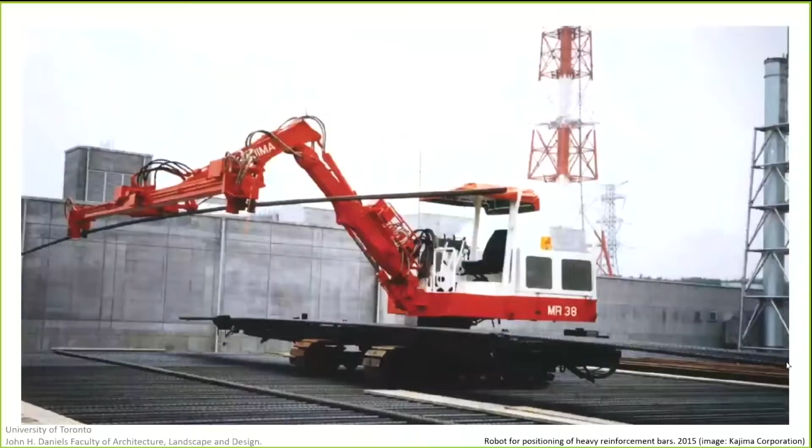But before we go there, I wanted to briefly touch upon, if not a history, but maybe a context of what construction automation and the relationship between a machine and a designer look like today, and what that relationship used to look like. And of course, today we see a lot of construction automation progress, as I'm sure is being talked about at this conference. And a lot of the construction automation is happening within these two larger discourses.

One is mobile and other types of machines for surveying. And the other one is automation of existing construction processes. So taking equipment that is already there, like this robot for position of heavy reinforcement bars, and then automating it such that it doesn't actually need a real-time human operator, or maybe only requires a teleoperator.

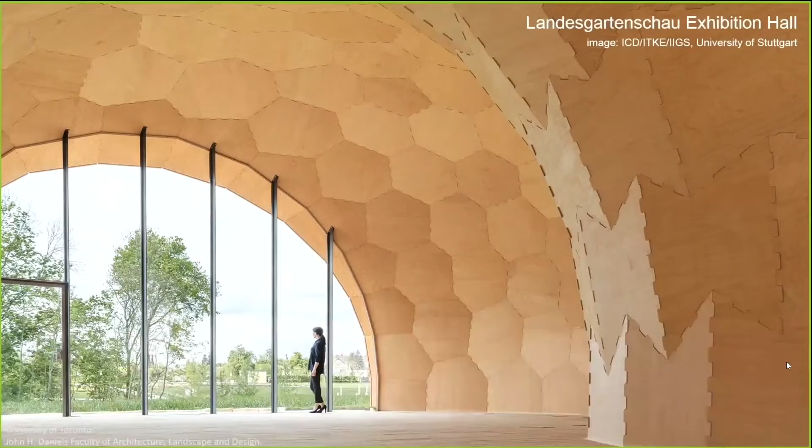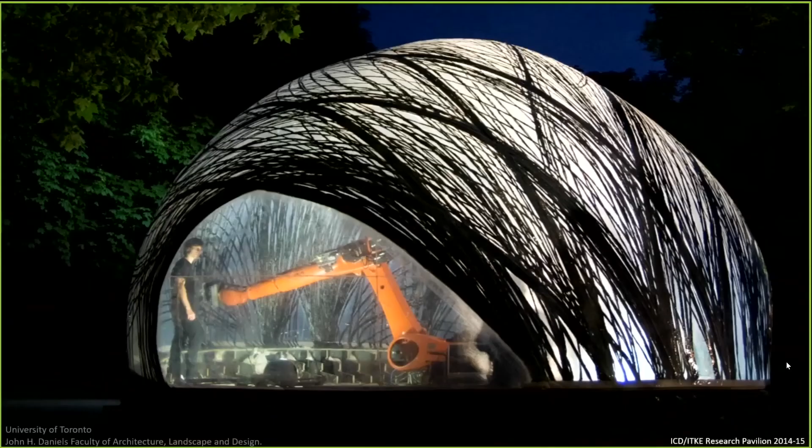And then, of course, there's another context that you're all familiar with, which is a more research-driven, more exploratory context, where we're not necessarily looking into traditional construction methods, but we're looking into technology itself and trying to figure out what new construction methods it actually allows, and what design spaces these types of technologies open up. And historically, this type of development and research has really been spearheaded by researchers in architecture and design using robotic arms.

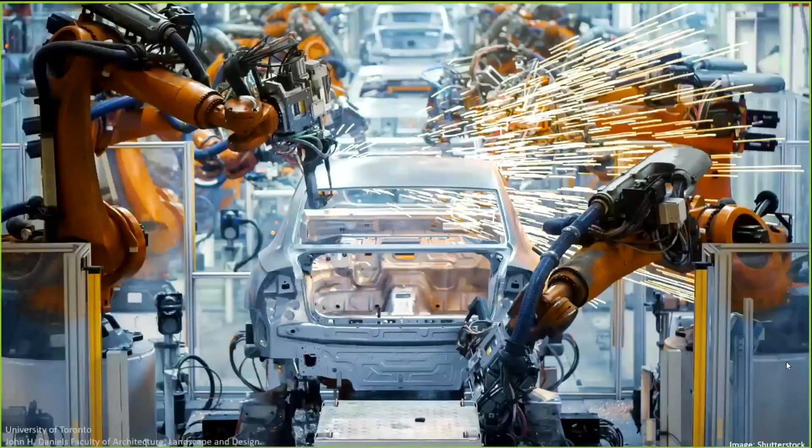That largely comes from a moment in time where they suddenly become available, and largely, of course, comes from the fact that they're extremely universal and reprogrammable and are capable of many different operations and many different tasks. However, despite the fact that we like to think about them as universal and reprogrammable, they actually come from a very specific place and a very specific set of tasks. They're generally designed for a manufacturing line where objects that are being produced are moving from one workstation to the other, and then machines continuously perform operations on them.

And in appropriating or reappropriating this type of equipment from the manufacturing side and bringing it into architecture, we as designers have to deal with a lot of constraints and limitations that these machines bring. One of the obvious constraints is, of course, reach, payload, the weight of the robot itself. If you were to imagine installing a machine like this on site, that comes with a lot of limitations. The structure needs to be able to support the momentum forces, et cetera.

But also, of course, economical and cultural constraints, such as the very steep learning curve, which is partially designed to be that way and partially just happens to be that way.

And of course, the cost of purchasing and running a machine like this. So somewhat in opposition to that status quo, and somewhat in addition maybe to that status quo, my practice lies around not necessarily interpreting and appropriating machines from the industry, but really trying to reinvent machines from scratch, almost sort of like reinventing the wheel, which may or may not be a productive undertaking, but I happen to enjoy this undertaking, so that's what I do.

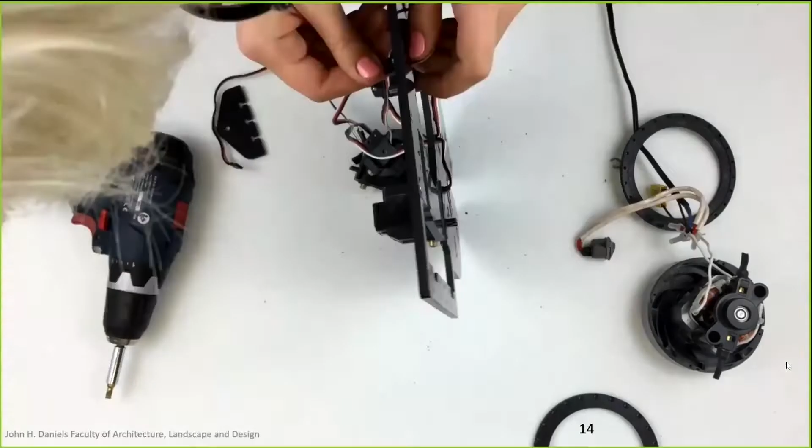But also the web directly relies on the shape of the environment. So depending on the space in which the spider decides to build its nest, the geometry of the web will change. So sort of thinking about this interdependency between the three parameters, the site, the object, and the machine, I've started developing, potentially naively, but also in retrospect in a very productive naivete sort of way, a first set of machines for fabricating in existing architectural environments.

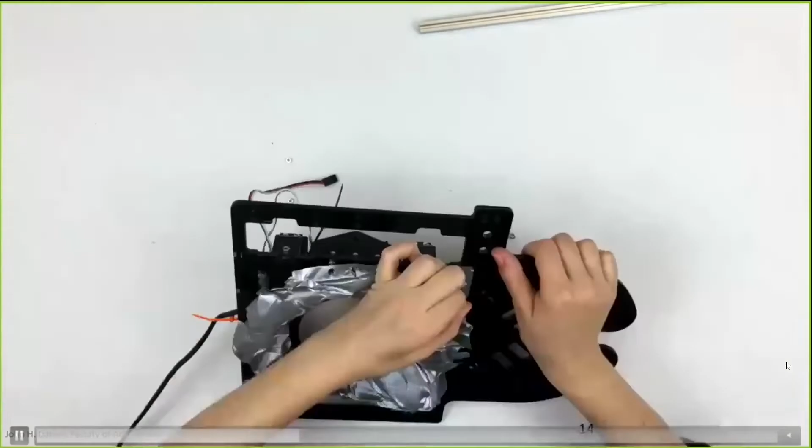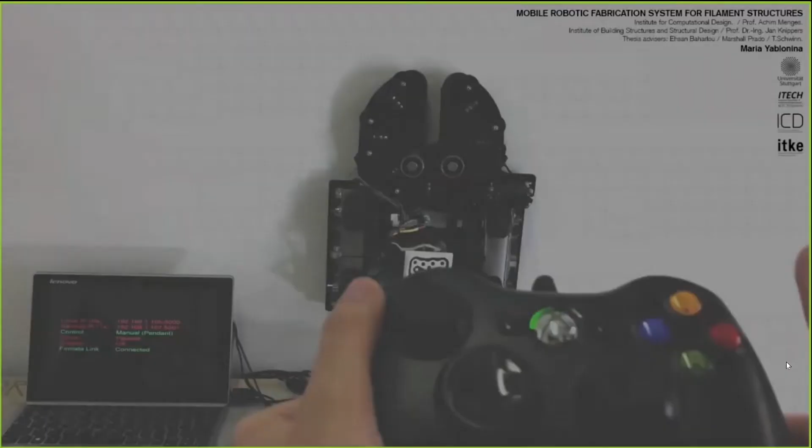And the reason why existing architectural environments became really interesting to me is I really wanted to explore not necessarily this notion of building from scratch, which is pretty stereotypical to the field of architecture, but really the notion of revisiting, potentially repairing, and reprogramming spaces that are already there instead of building anew. So this particular machine is able to navigate its environment.

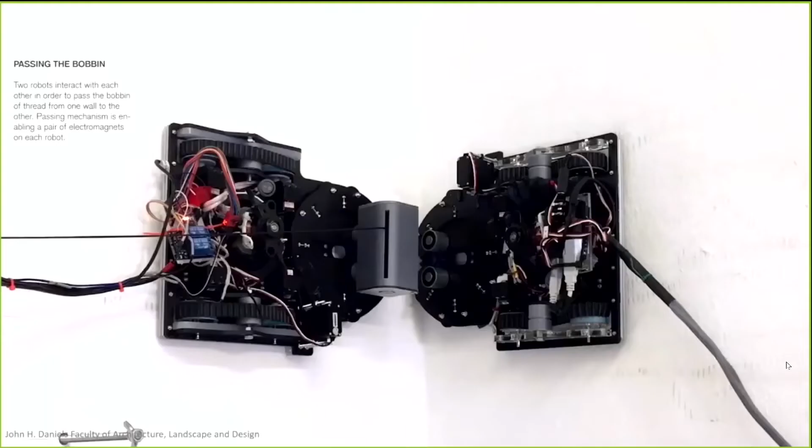The way it navigates its environment is it climbs along vertical or horizontal surfaces, but I guess the vertical surfaces is what matters. So it can climb walls. It can navigate. It knows where it is in space using an external camera system. It can carry a piece of material, and it can interact with another robot of the same type by meeting it at the corner between two walls and passing this material cartridge between them.

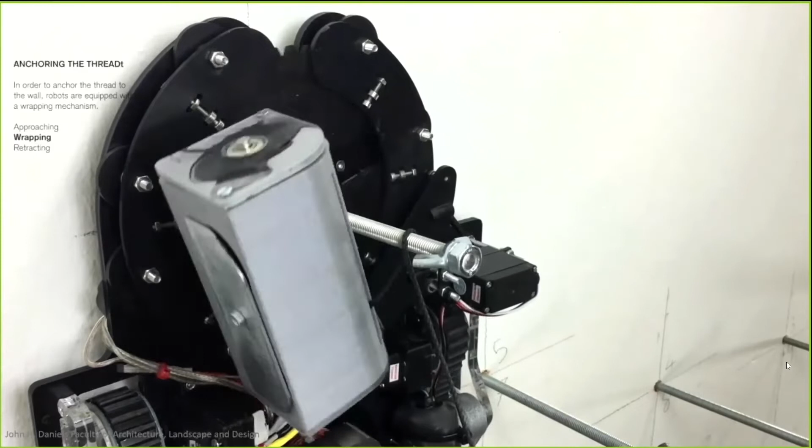It can then anchor the material to pre-installed anchors, and thus, you can already guess, I assume, where this is going. By performing these three very simple routines, two machines working together in a space can start creating, if not architectural, at the very least furniture scale objects in situ. And what is really powerful for me about this particular system is not only the use of mobile robots or the material system of web weaving, but how scalable the system becomes by using these really, really small scale machines.

When I say scalable, I mean not only scaling up, but also scaling down. I think scaling down isn't talked about in architecture and construction as much, but I firmly believe it's actually a very important parameter.

Looking back at this project, reflecting on it once it was done and the panic of the deadline wore off, I started to think about how the project was really initiated as an attempt to get out of the limitation of a robotic arm workspace, but then it got into a whole new set of limitations. Specifically, this system is limited to interior spaces with 90-degree angles, so any other geometries and the system wouldn't work anymore. Of course, it's also limited by the tether, by the cord.

The battery conversation is both my favorite and my least favorite conversation. We'll get back to that in the Q&A.

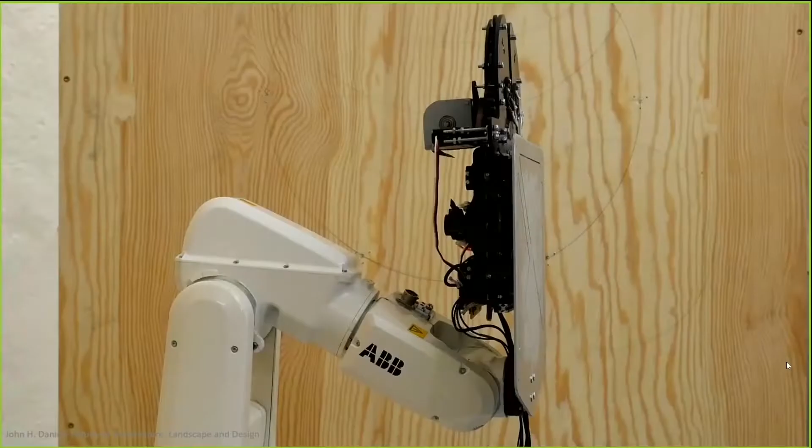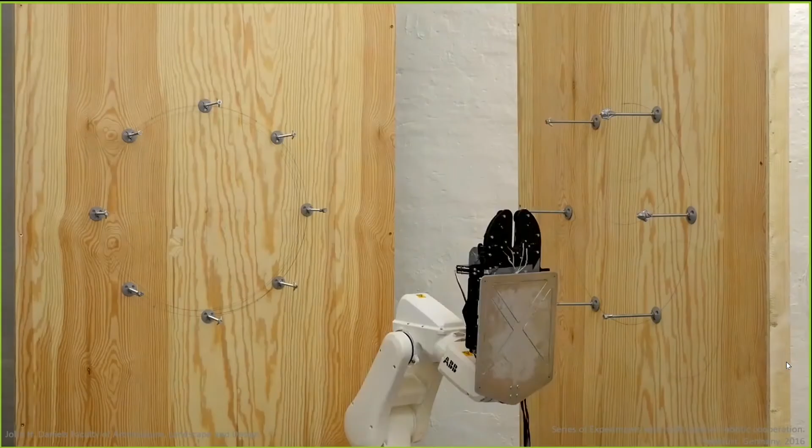For the next iteration, I was reflecting on this project, almost apologizing to the robot arm for excluding robot arms from my work, and started thinking about how combining multiple different species, if you will, of robotic creatures could create more flexible and more modular workspaces.

In this scenario, I have the same wall climbing machine, but instead of having two of them in the same space, I add another small robot arm. That means I can now extend my work envelope not only to the two surfaces you see in this video, but potentially more, even three or four, as long as they all sit within the reach of the robot arm.

So even though the robotic system itself is not necessarily modular, the way these workspaces can be combined into a global multi-robot collaborative work envelope starts to introduce a certain level of modularity, meaning these systems are deployable in many different scenarios.

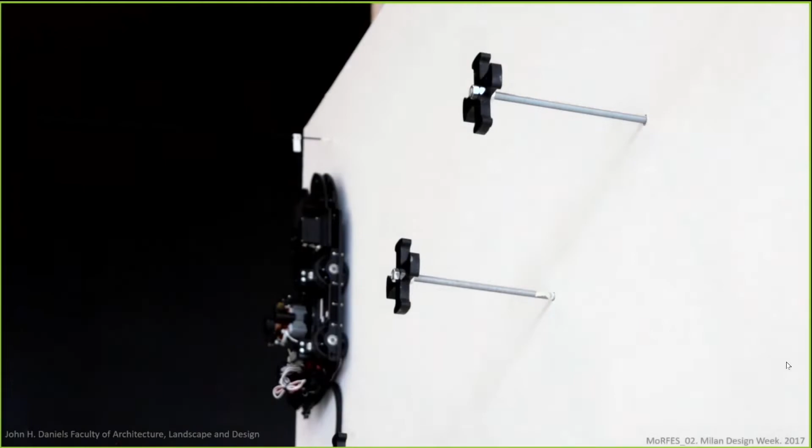This next project happens later. It was conducted at Milan Design Week. Here the system is quite similar to the previous two, where we're relying mostly on the wall climber.

What's interesting here is that the multi-speciesness of the system now relies on a new type of machine that I call many names: a cable shuttle, a thread walker, and also Peter Parker. Depending on who I talk to, the names change. Peter Parker frankly sticks the most because, you know, spiders.

In this cooperation of these devices—three devices of two different types—we can achieve a really extensive work envelope while keeping the size of the machine body the same. Not only does the work envelope grow, but the opportunities to use these devices in spaces already occupied by humans are pretty unique compared to any other larger scale machine.

Specifically, if we think about a robot arm, it's hard to imagine an installation being built while people are walking underneath the installation itself.

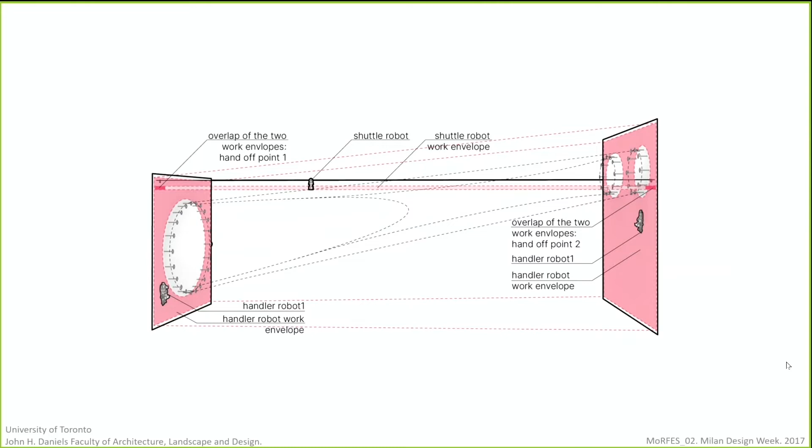Just to briefly outline what I mean by work envelope modularity, this project does a really good job showing how combining two-dimensional workspaces of wall climbers and connecting them with a simple, very minimal cable shuttle affords the full space that the interior of this exhibition offers.

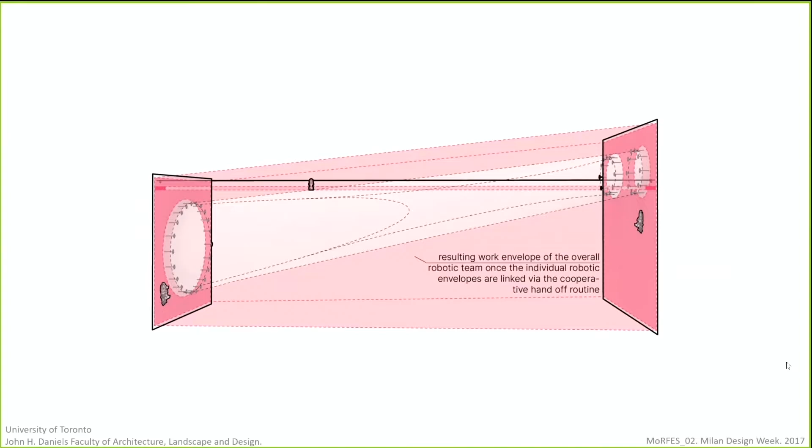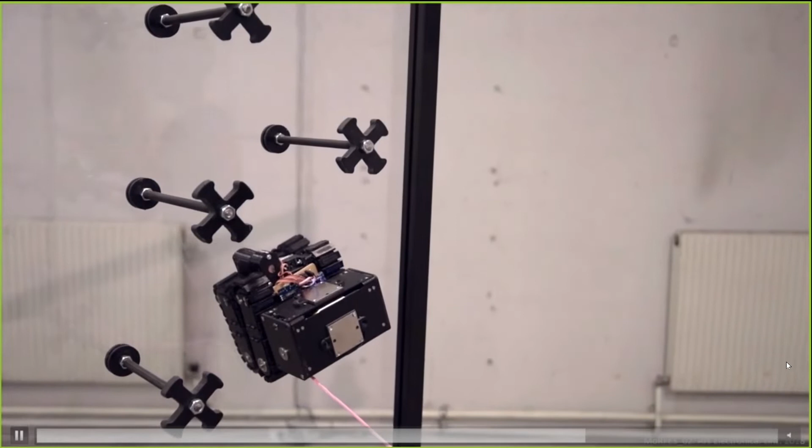The next project I wanted to show also lives within a similar context of small machines working in cooperative teams, extending each other's work envelope. But here the context is a little different. This continues the thread—no pun intended, I promise—of development of projects where work envelopes are explored, but I also keep chasing the limitations and trying to get rid of them.

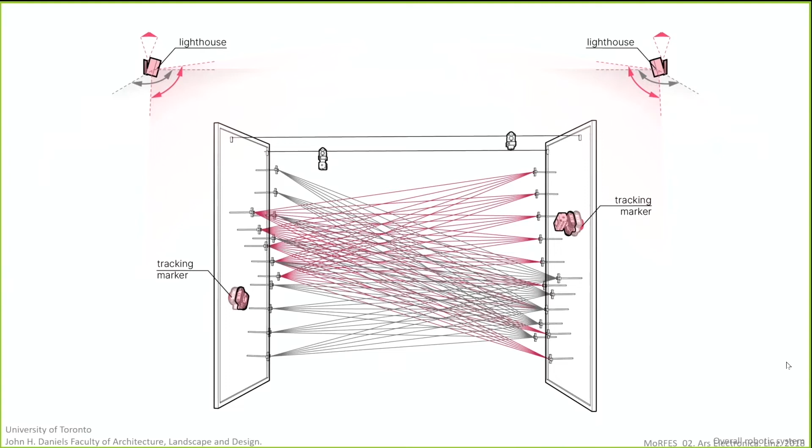This project was developed to live on a different substrate. If the previous projects live on walls, this one lives on sheet materials. As an experimental setup, the sheet materials were actually installed in the space, designed and installed specifically for it. But the theory is that a similar system could operate on any architectural sheet material—be that a facade panel, a window, or any system one could imagine as a substrate for these fabrication processes.

So here, the thing that changes is basically responding to the previous project and limitations in terms of time and tether. Again, battery question is the worst and the best question. So this system relies on a very different attachment strategy to its substrate because it does not require any sort of high power vacuum device in order to stick to the surface.

These machines are actually battery powered, which means on one hand, yes, they can travel longer, but what is actually more important is the choreographies of their navigation along the surface become more complex and open up, again, new design spaces and new possibilities. And just like in the previous example, the combination of multiple work envelopes and workspaces really creates this overall robotic system workspace that sort of also serves as a design space on a designer side.

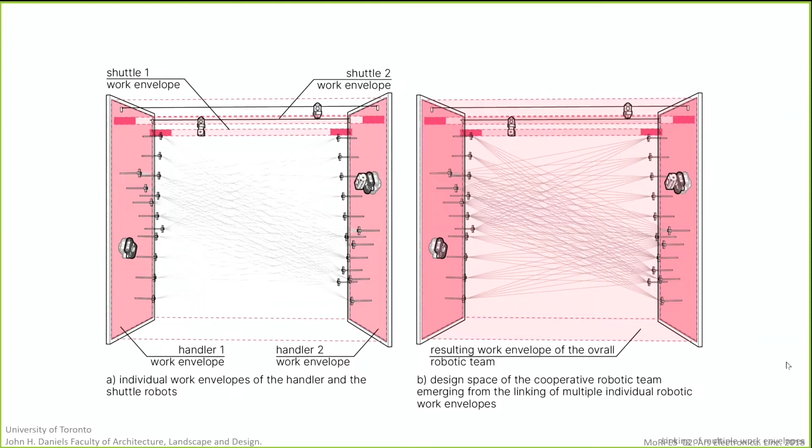I'm going to jump, no, wait, not yet. I'm not going to jump.

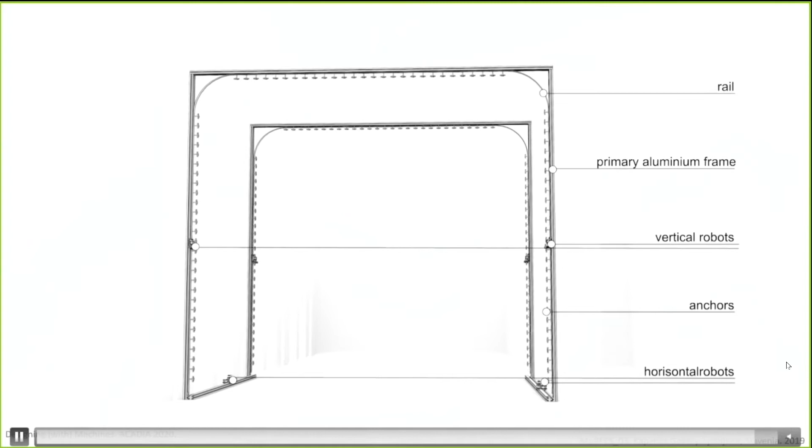Another project that I wanted to show you within this context is sort of a third iteration or a fourth or a fifth iteration of this idea of designing with robots such that they are site and task specific. This project was conducted in a gallery. When I was invited to do this installation, I was really excited to deploy a similar surface climbing system, but then I showed up on site and realized that the space that they were offering didn't really have any proper surfaces or any continuous surfaces for me to work with.

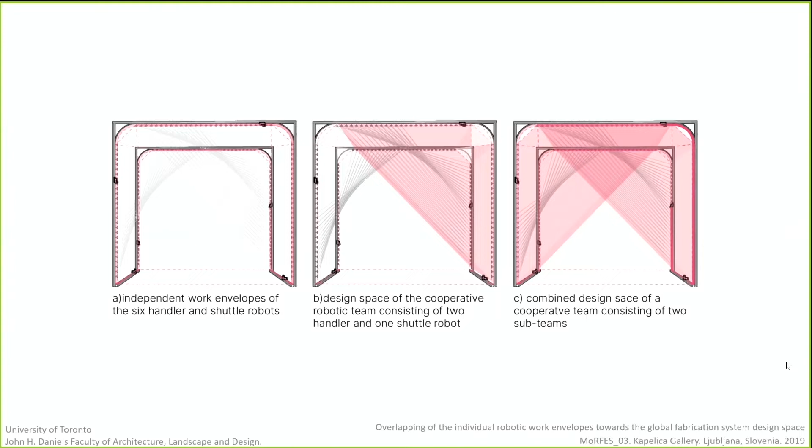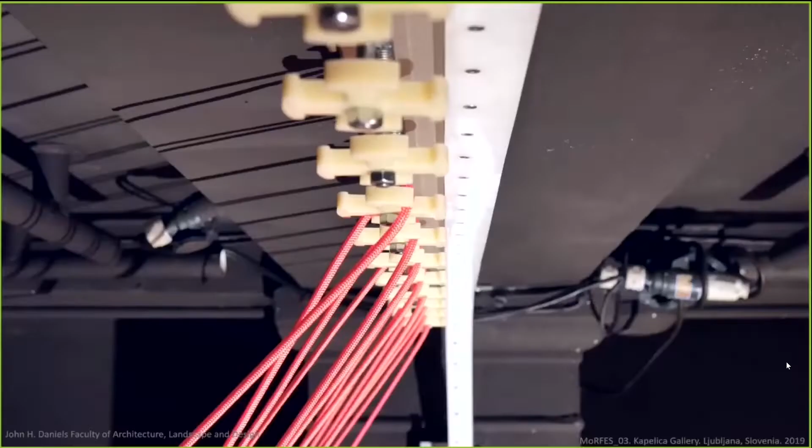So the system had to be reshuffled into a new sort of combination of, again, interdependent robotic entities. And in this case, the primary locomotion system for navigating the existing interior design substrate was a rail-based locomotion. Because the space already had a set of columns and beams, what we ended up doing is adding this extra layer of substrate that allowed for development of these simplified locomotion systems that would drive on these rails and interact with each other in order to pass the filament from one machine to the other.

Each of the vertical machines could navigate both the column and the beam on the ceiling, thanks to a special little arch or fillet piece of hardware. And similar to the previous project, over iterations of anchoring, passing, and anchoring procedures, the robots would eventually construct or wind this large-scale filament object that can be occupiable during the fabrication process, which to me is one of the most important parts of this research. And it sort of becomes both an installation and the performance.

What was interesting during this particular part of the fabrication process is, well, I had to be there. There were certain issues with the sensors, so I had to really be there in order to operate everything live. You can see that I'm helping the robot and feeding it the material. But I was really hoping that people would occupy the space as the performance was ongoing, but somehow it was framed too much as a stage and people would not really enter the space.

And another thing that I wanted to touch on before I move on to the last project is how in all of these, there's this modularity of workspaces, but also there's a modularity of the design process. When there's no machine to start off with, one has to really consider everything at the same time. And this particular diagram that describes the way this project is designed is clearly very messy, and it's not really intentionally messy. It ends up being messy because the design process is messy.

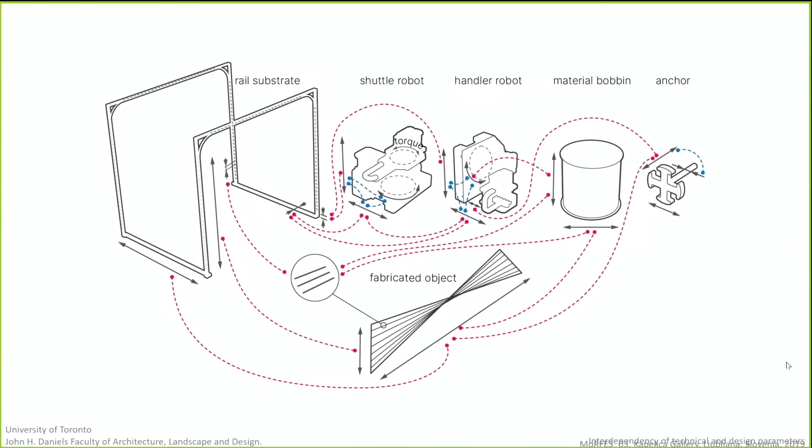And that's not even talking about timeframes and budgets for hardware purchasing. But through that investigation, what becomes interesting is that this approach to designing, and this way of thinking through mechanical, structural, and design parameters, can actually lead to pretty successful outcomes despite it not being a computational or parametric system. Maybe it only makes sense to have a parametric system where there really needs to be one.

So I'm going to shift gears a little bit for the last couple of minutes of this presentation and talk about a somewhat different, but also in some ways similar, medium with a different audience - a project which is currently ongoing. We're currently on a third iteration of the robot. This is a project I'm currently working on with Zahner, the fabricator, one of the biggest metal fabricators in the United States. I'm sure many of you are familiar, if not working or have worked with them.

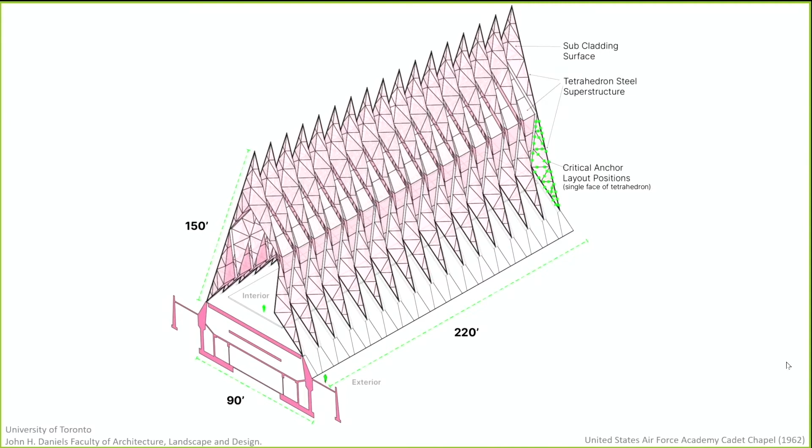This particular project is a building that many of you may or may not recognize. It's the Cadet Chapel at the United States Air Force Academy, built in 1962, that is currently in need of significant renovation. I'm not going to go into details of why and how, but the primary part of this project I'm working on is figuring out how to install facade panels on a very, very complex substructure that was built in the 60s, and we don't really have a good understanding of what it looks like anymore. So the first layer of investigation is figuring out what the structure looks like right now.

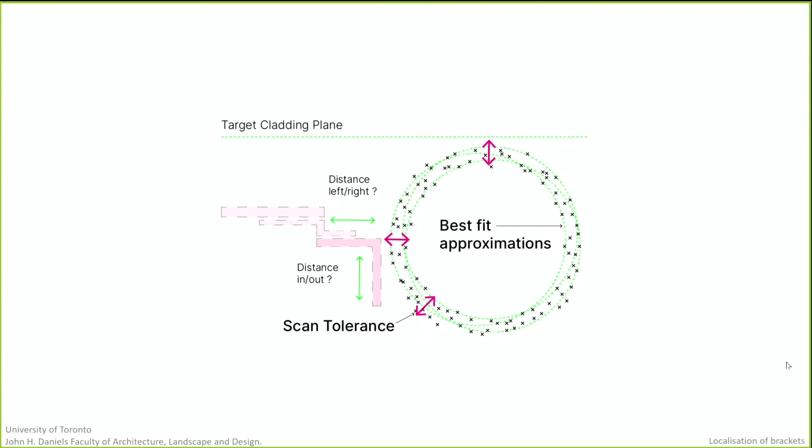This is done by laser scanning, really high resolution laser scanning. But what we've discovered is that laser scanning, while providing a pretty good understanding of what the structure is and where it is, it's not quite accurate enough for us to get into the second stage of this renovation project, where we're installing these anchors for the facade panels. So that's the primary problem: figuring out not only where to install the anchors, but also how to localize them such that they actually provide enough accuracy for the facade system, which is extremely high tolerance.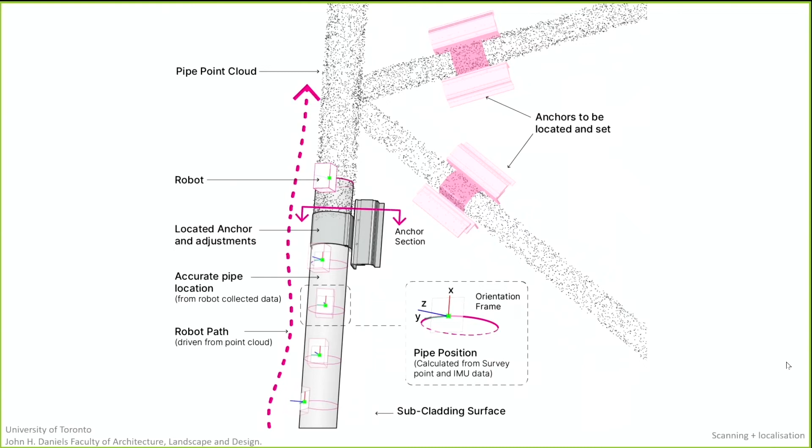So the solution we've come up with is this, again, a climbing robot, of course, because why else would I be on this project? Basically, it is a climbing robot that can navigate along the pipe substructure of the building. It knows where it is in space, and as it navigates, it provides a secondary scan, and it can also mark places for the installation of the anchors.

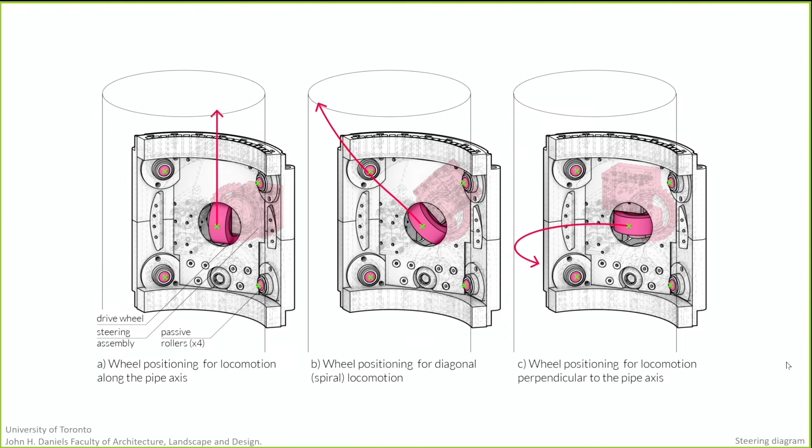So the robot itself looks something like this. I wish I had it here with me so I could show you, but maybe next year. The machine is designed to navigate this very particular type of pipe that the building is built out of. It is extremely site and task specific, but that is sort of why it is so powerful in the context of this particular project.

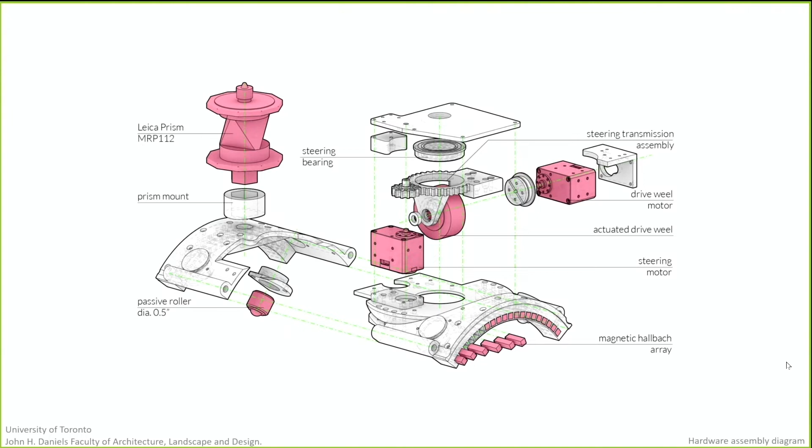So the machine carries this little Leica prism, which is basically a marker, allowing it to navigate itself in real time in space. As it navigates, it gives us a digital model of the pipe. The true steel pipe from our initial tests is always a little bit off from the digital model we get from the laser scan.

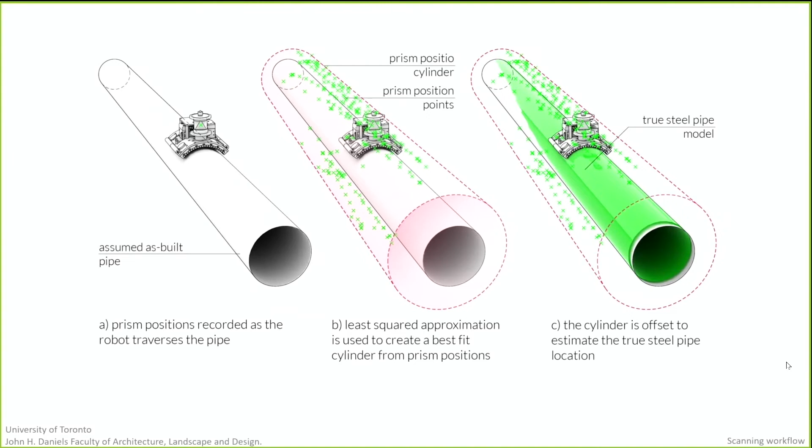We have not yet deployed the robot on the actual construction site. We've been testing it on both pipe prototypes and parts of the building mock-up prototypes, but so far the testing seems to be very promising. We have some more exciting tests scheduled for the summer. This particular model, I believe, is model 1. We're currently developing iteration 3, and I'm really excited to update you next year on how the project is going.

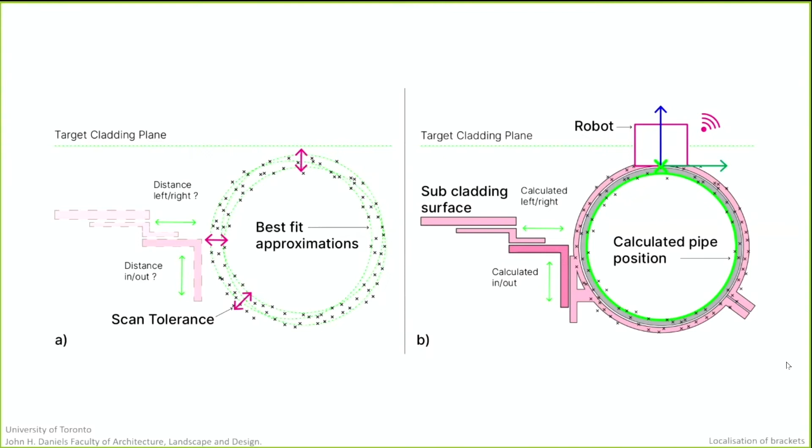But one thing I wanted to say about this particular project, and one thing that is important in this context to demonstrate, is that this project was fully done during COVID.

I have not seen James in person up until a couple of weeks ago. The whole project happens via post and Zoom, like the whole design process. I ship robots, I ship software, I get photos and videos back, and then we jump on a Zoom call and we troubleshoot.

It's amazing how the scale of the machine really affords that. Thinking about setting up something similar in a different manufacturing or fabrication scenario would be really, really hard to imagine. But this sort of works. We'll see where it goes.

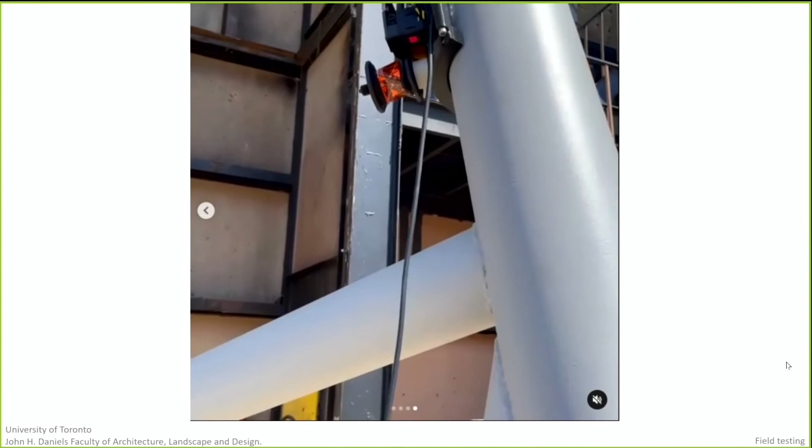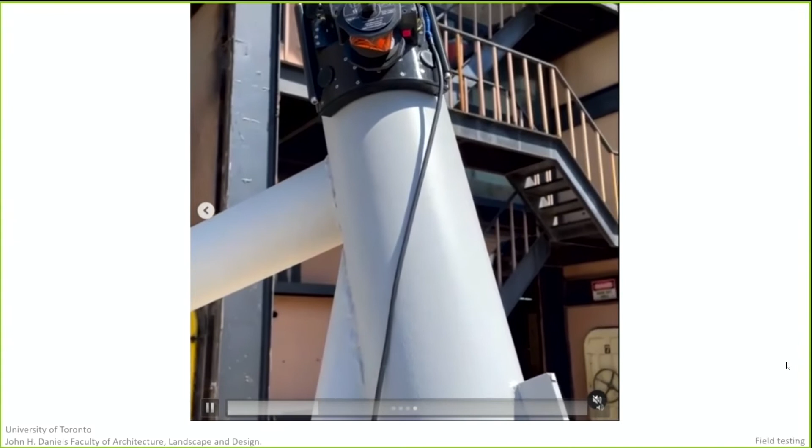I'm going to show you one last video of our robot climbing on the actual building mock-up. I see I'm running out of time, so this is where I'm going to wrap up. Thank you again for your attention, and hope to see you all in person next year. Thank you so much.

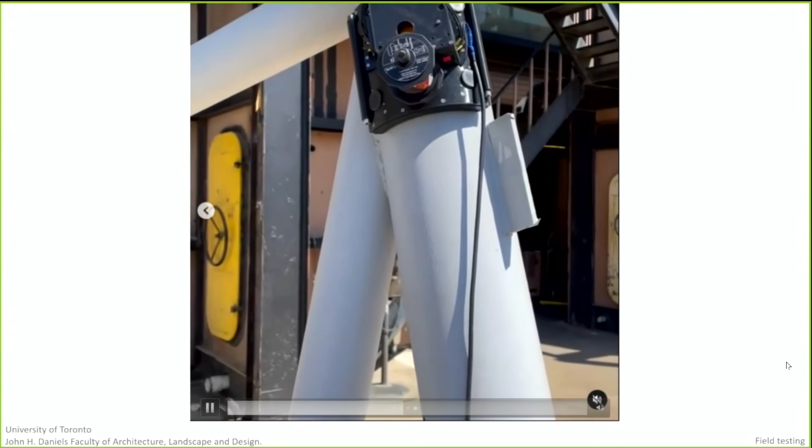I loved your presentation, and it struck me that the kind of skill sets you're showing here - you're an architect, you're a mechatronics expert to some degree, you're a programmer, you're an artist. How does one go about getting a skill set like that? What interested you in everything in the world, and knitting as well? Of course, knitting is a part of what you were showing us today.

Very good question, and I don't have a very good answer. I do have a weird echo though. Oh, okay, I'm gonna try and ignore it.

It's kind of my career and the way the practice is built, sort of largely happened by accident. I got really obsessed with design, and then I discovered that the skills transferred into mechanical design, and then I got really obsessed with computation. It kind of built around many obsessions, and many times a hobby turned into a practice. I think I'm finding myself yet again at a sort of intersection of decision making, like who do I want to be now? Am I more of a roboticist? Am I more of an architect? There is no clear answer, nor do I think there should be. But yeah, I don't know, I like wearing many hats.

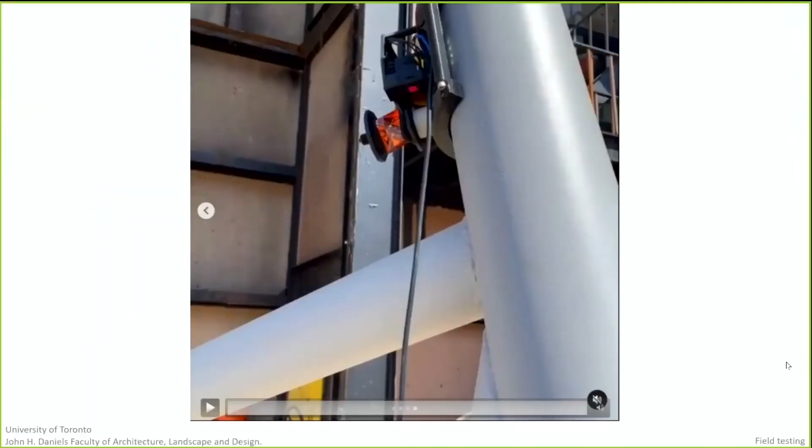So the robot is carrying a little marker. And let me see if I can share screen again to quickly show you. I don't know if you see my mouse, but I'm just going to assume you do. So this orange thing, sort of backpack, we call it, is actually a machined piece of glass. And on the ground, we have the total station itself, which basically looks somewhat like this. This is actually a good video.

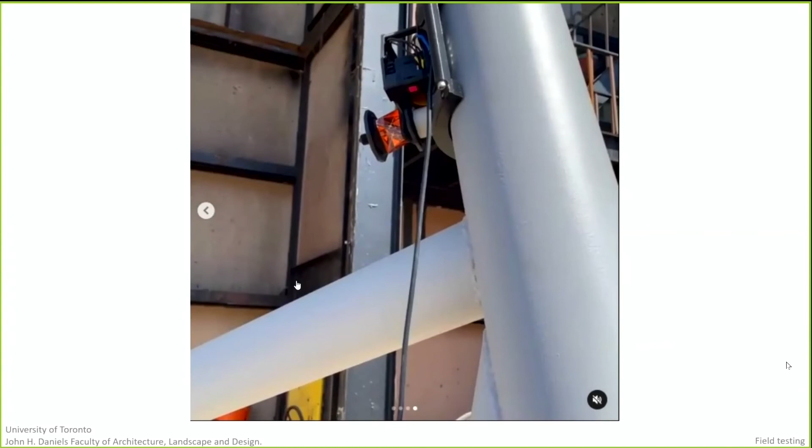Okay, thank you. So I have another question: how do you plan the trajectory of the robot? Do you use the Robot Operating System or another way? Because I saw it cooperates really well and it's very amazing.

There is sort of an evolution of techniques and scenarios, but I keep on planning on integrating Robot Operating System, and I keep on staying in Grasshopper world. For this particular project, the reason why we're using Grasshopper is because we're working with already existing Rhino files, so it sort of works for us. Because it's not a very high speed application. As long as the robot eventually gets where it's going, fine.

And also, when we're path planning along a pipe for this particular project, there are two, or I guess three, parameters that we have to take into consideration. One is of course the tether. This robot is not battery powered. It always has a cable, and there's no plan to make it battery powered because we don't really need it to be untethered. So you need to plan such that you don't entangle yourself.